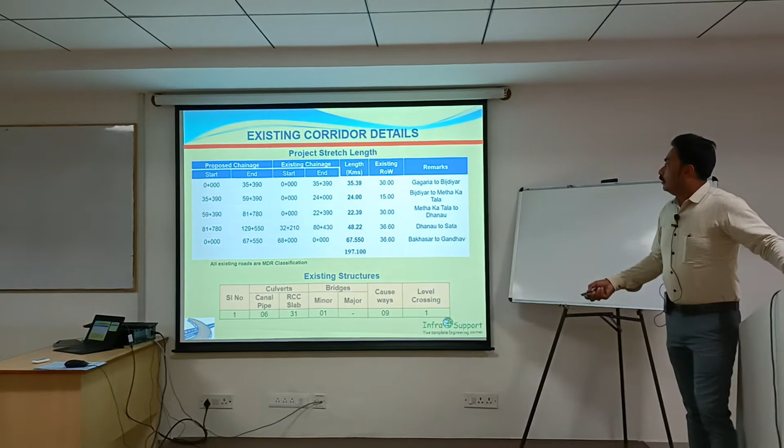Okay, fine. So... this is the receiver for this side. Is that USB connected? Yes. Oh yeah, it's USB connected. USB is connected. Distance is not key.

Okay, so this is a road project in Rajasthan, in a district called Barmer, close to the Pakistan border. Recently, about 4 or 5 months back, if you read the newspaper, Nitin Gadkari, your transport minister, landed his aeroplane on a road. Any of you read the news? That was the road we designed. That is the first road where the government wanted to build the carriageway as a runway also, so that an emergency landing can happen. Now they have made it mandatory on selected highways. So it is for a strategic purpose. And since this road was also on the border with Pakistan, we have designed a runway also in this.

Now, typically when a National Highway Authority of India, or Ministry of Road Transport and Highways, or a Road Development Corporation in Karnataka or any state appoints a consultant like us to prepare a DPR of a project, that project road can vary from say 10 kilometers to 100, 150, 200 kilometers. For every road to prepare a DPR, they expect a team of qualified civil engineers.

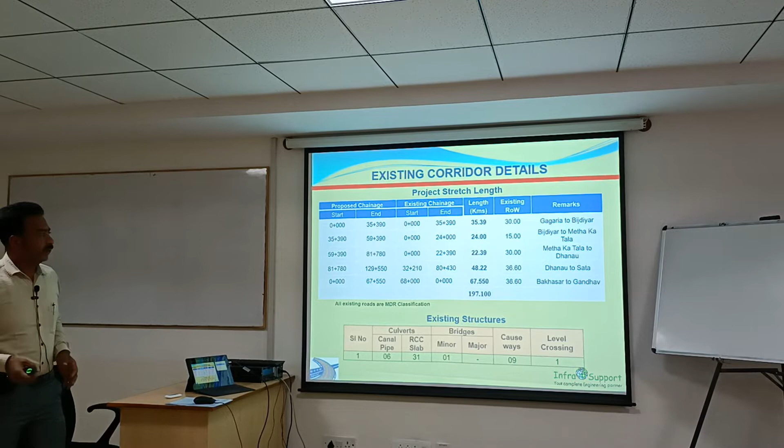So what we do first is understand what kind of road it is, from where to where. If you consider the 200 kilometers, it is not constant, not homogeneous - you will have different villages, towns, settlements. So we break it down, and also depending upon the carriageway width, some length may be intermediate, some may be single lane, some 2 lane, some 4 lane. Based on that we make homogeneous sections - this point to this point has this characteristic.

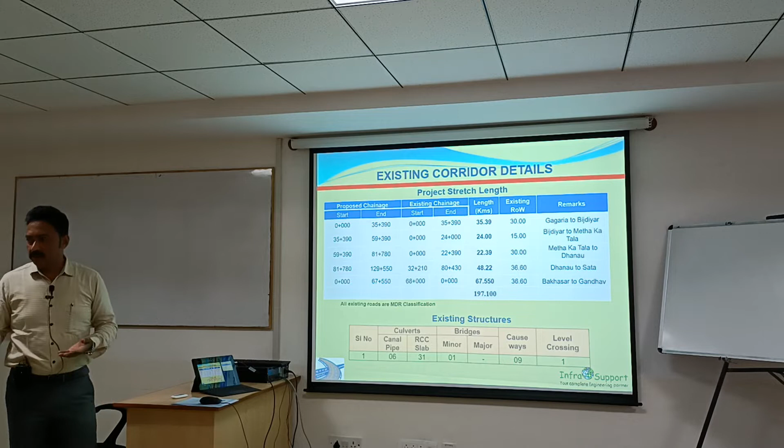You see what we have done - the ROW varies from section to section, and across all this, we noted the kind of culverts and bridges present. One thing we observed on this road is there are very few cross drainage structures. The same road in South India would have, for 200 kilometers, at least 150 bridges, culverts, minor bridges, major bridges. But there it is a complete desert - this part of Rajasthan is desert with sand dunes. Not many cross drainage structures because there is no rainfall and no nala streams and such.

First thing we have to do is check the existing right of way (ROW) available, which is very important nowadays. If you've seen everywhere, land acquisition is a big issue, and everybody is interested in knowing how much ROW is available.

Now, what is the number of villages or towns within this corridor? This is important to note. So first we determine from which NH to which NH, what different kinds of villages are there. There are so many villages here, though this is far less compared to other parts of the country because it's a border place and a desert.

Now in any typical DPR, you will have to do all these investigations and studies. First is road inventory and condition survey. You might all know what inventory and condition survey means. Within that you will have about 10 things to do.

In inventory, typically you measure the width, length, height of the embankment, all that. The condition survey tells you the pavement condition, crust thicknesses, distresses, all that. Then similarly you should know exactly the same for the cross drainage structures—how many bridges, how many culverts, and their condition, whether good, bad, or failed.

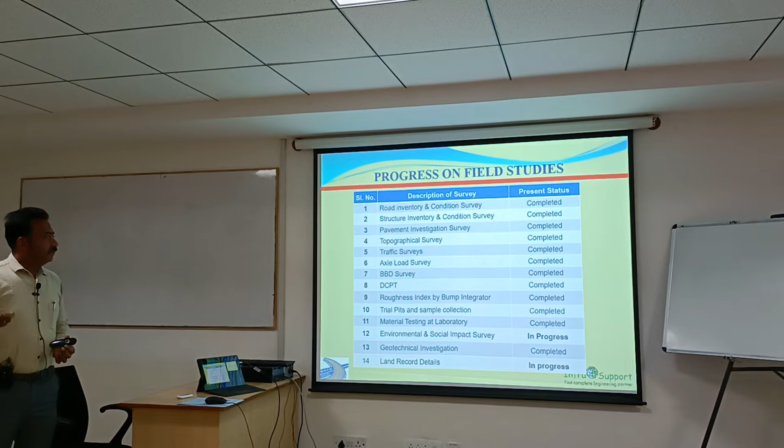Then Benkelman beam deflection survey, again for pavement deflection. Now we've moved—this is a 5-year-old project—so we've moved everything from BBD to FWD, falling weight deflectometer. Then we also do DCPT, which is again a soil test, CBR. You take a pit and do a dynamic cone penetration test that gives in-situ strength of the soil. Then roughness—earlier we used the bump integrator, now we're moving towards the roughometer.

Then trial pits are very important to know the pavement design—you need to know soil characteristics, soil strength, CBR. Then material testing: you have to test the soil, and also go for borrow areas to see where your soil and aggregates are available, and whether those aggregates and soil are suitable for construction. You have to test all that.

Another important survey, normally not taught in classrooms, is environmental and social impact surveys. When it comes to environmental, there's forest lands—if the road goes through forest land, a separate study must be done on the impact of this project on the forest. So how many trees you're cutting, then there's a series of permissions required from the forest department. That is called environmental impact survey.

Similarly, social impact is when there will always be some houses or villages you have to pass through, and you have to demolish those houses. This is called social impact. So what happens—how much compensation do you have to give? Can we demolish this house, or if not, is there an alternative alignment to take? These are all part of the social impact.

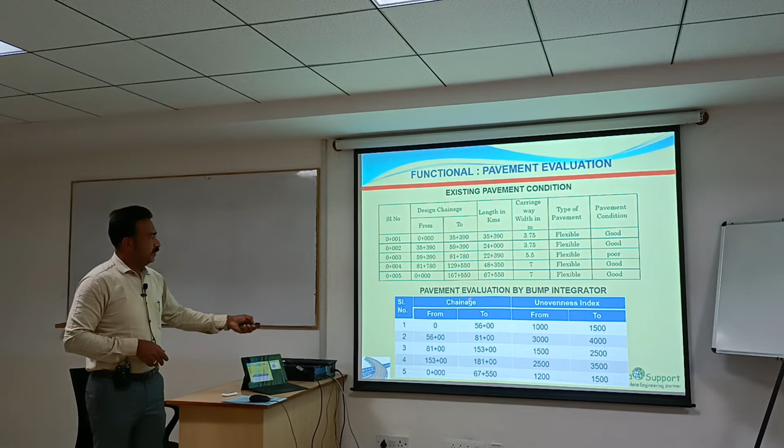Now there is a variation in roughness also. Like up to 56 kilometer, the unevenness is like this. Then you have 3 to 4, 1.5, again 2.5, 2.5 to 3.5, 1.2, 1.5 — it varies.

So these homogeneous sections — how do you make this? It's absolutely left to highway engineers, based on our experience. There is no standard rule. Depending upon the outcome we want to deliver, we can make these homogeneous sections. If you are smart enough doing a proper homogeneous section, you will save a lot of time in the entire study analysis.

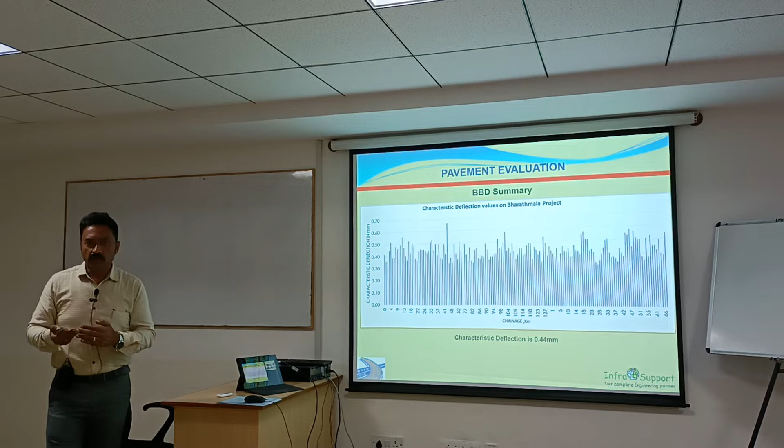Now again the deflections. We plot these deflections kilometer wise for the entire length and see. If you have studied deflection values, you will know — if the value is say 0.8, the value is less, the condition is good.

Or it can take load, the serviceability index is still good. Normally in our practical experience we keep 0.8 as a parameter. Some people will say 1 — anything greater than 1 is not good — but we keep around 0.8. Anything more than 0.8, we will again go for subjective studies to see whether it can be placed or not. So 0.8, 1, you should always remember when it comes to deflection.

Now, you have all been taught how to do a BBD survey. Remember this? What do you get in the BBD? So what does the deflection give you? What is the outcome of the deflection study? What do you mean technically? So you get a value of say 1.2 — what does it mean? It is a Benkelman beam method. So what does that indicate, if the value is more?

You all know — come on, shout it out. What's the answer? This is not taught in pavement management? Come out with the answers. What do you understand by a higher value of deflection?

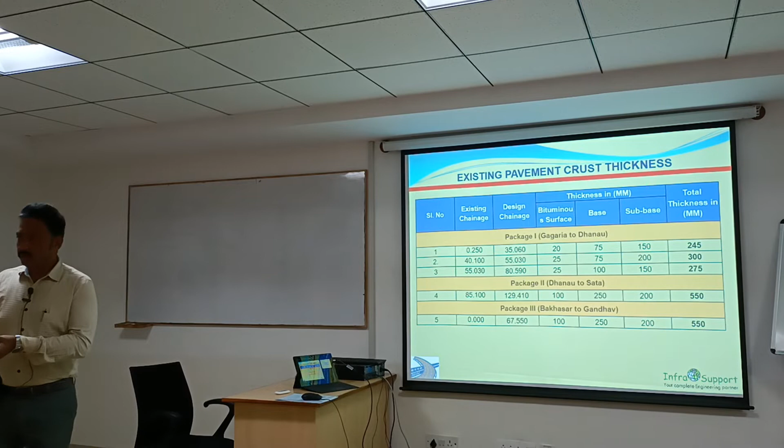Now you do a pit at the edge of the carriageway to measure what is the thickness of the existing pavement layers. In this case, there was a kind of sub-base layer of 150 to 200, base layer as all aggregates, and then a thin bituminous layer. That's all was in this road. It is not well constructed.

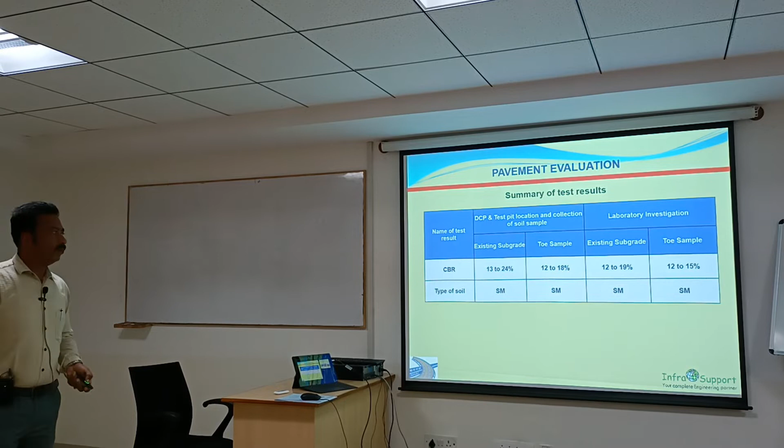Now, you all know CBR, right? Why we do CBR? Bearing capacity. Yes, study CBR, why do we do CBR? To design a pavement. Based on the CBR, you know the graph, right? That is how you have to design a pavement, and somebody has invented CBR, so you have to do this - it is a value, it gives a strength, and based on that only you can do a pavement design. So you have to do mandatory CBR. You know how to do CBR and all, right?

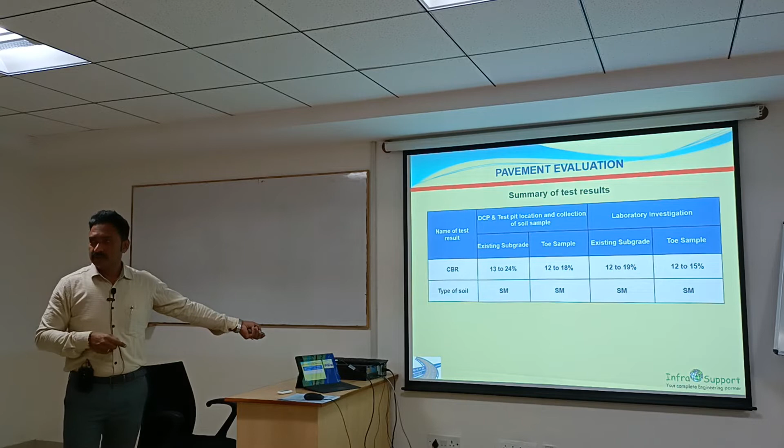This is how you do a test pit. Not very professional, but there's a kind of labourers we got there. Actually, you have to cut at the edge so that your pavement layer has to be exposed. There is an IRC code how to do 1 meter by 1.5 meter depth and all. The problem is again you do the pit and then you have to backfill also. So somehow we are little practical.

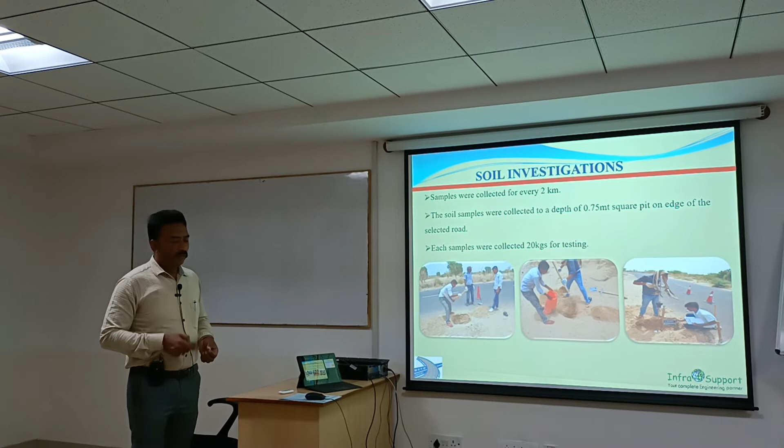You are able to see this, I mean this is fairly okay. And then collect the sample for CBR test. And we will also have a slate written what is the chainage number and all. These are for records.

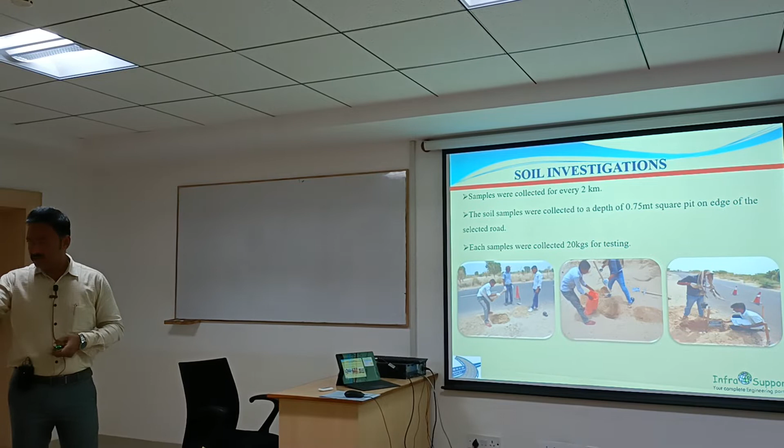So you have studied here, right? So we did every 2 kilometers. Do you know what frequency we should do CBR? Any idea? Yes, no? As such, there are no criteria like how frequent you have to test for CBR. But only thing as engineers, we must test everywhere you see physically there is a change in soil at least color type. But otherwise, we normally say about 2 kilometers we take samples so that we don't want to miss any changes in the soil characteristics.

Because you must always know if you are studying about 50 kilometers of road and every 2 kilometers you test CBR, every meter you do roughness survey, every 50 meters you do deflection study, you are not going to design road for every 50 meters. You are not going to change the crust thickness for every 100 meters or every kilometer. You always design for the weakest soil condition and the heaviest traffic loading, right? Weakest soil and heaviest traffic. So that's why the homogeneous sections play very important. You take the homogeneous section of 20 kilometers, you will always design for the heaviest traffic and the weakest soil.

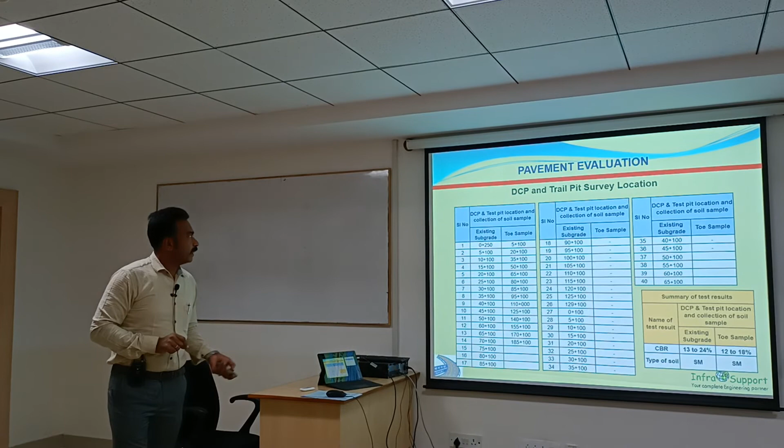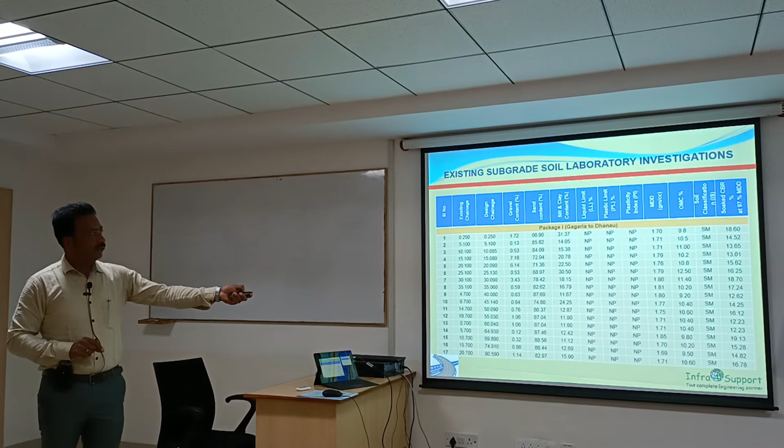So again, this is again a kilometer wise test. Then CBR, whatever the chainage has been collected, sample. This is all the classification. You all know these terms, right? Liquid limit, plasticity index, MDD, OMC. You are all aware, right? What is important in this?

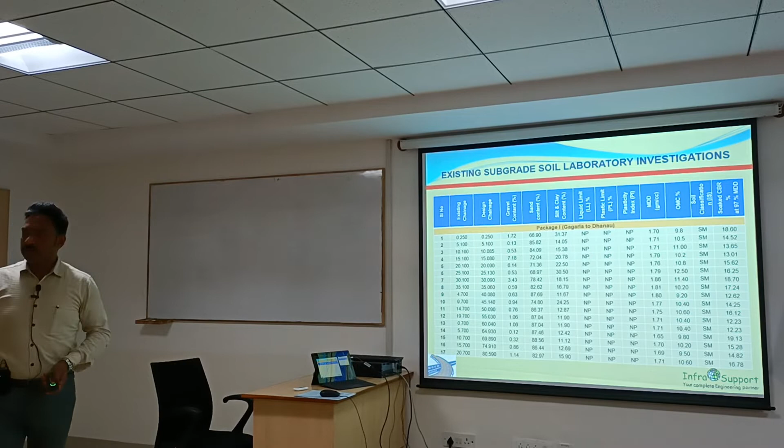2-3 parameters, MDD is important. OMC is not important. MDD is important, right? So CBR is important. Density is important. Plasticity index is important. 3 things you always remember in any soil for road projects. What is important is number 1, plasticity index - your soil has to be PI value of NP, right, that is very critical. A density of more than 1.7. CBR value we can design for any 2, 3, 4, 5. Normally we prefer about 8 to 10% CBR. Now the new codes are asking us to design for 15% CBR also. So always remember 3 things, right? Plasticity index, your density, and CBR.

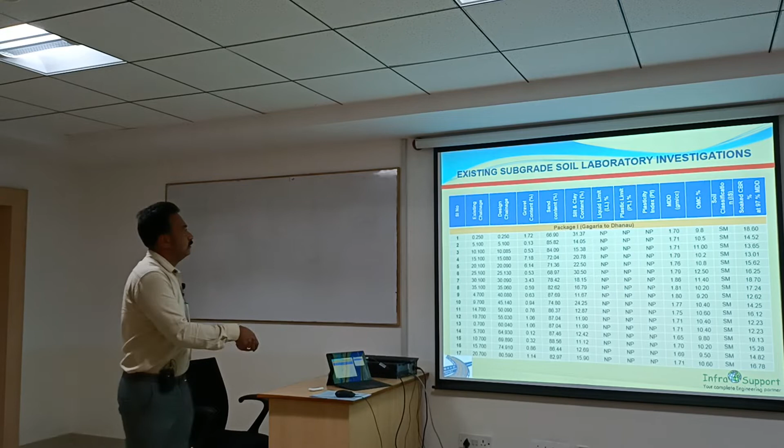Tomorrow when you attend interview, we'll be asking the same questions. You should prepare for all this.

So again, what my team does is they go along the road and find out where the quarries are available. Quarries are very important. Without soil available, without aggregates available, it's very difficult to construct the road, and also it requires for your costing. You should know if the soil is available close by, the cost will be less. If it is far off, the cost will be more. Unless we assess this properly, our entire project costing will go wrong. So you will have to check aggregates and earth, soil.

Bring the samples, again test for acceptability. If it is soil, you always check whether CBR is there, density is there, and plasticity index. If it is aggregates, you know all the tests, like gradation and impact, flakiness, water absorption, right? Yeah.

Okay, so very important then, traffic studies. Why should we do traffic studies? Traffic is the basis for the road development, right? If there is no traffic, no road is required. So depending upon the volume of traffic, you will decide how many number of lanes are required. Traffic is less, 2 lanes. Traffic is more, 4 lanes. Furthermore, 6 lanes, right? That is why you require volume studies.

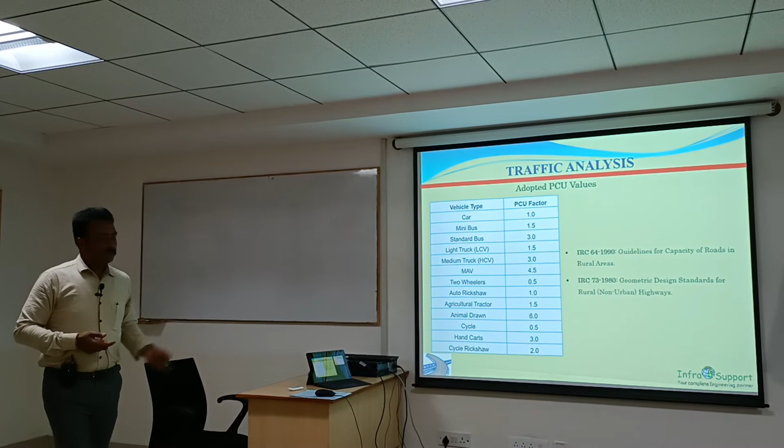You know PCU factors? Yes? Yes, no, maybe? Say yes, I'll not talk about it. Say no, I'll talk about it. ICM students would not be familiar with it because there are both branch students here. Highway students would know about it. Okay, so then they should not know also, not required, right? Passenger car units - this is the factor to convert all vehicles into a single parameter. These are the values, and you get them from IRC if it is a rural highway; if it is urban, it varies. You must know that PCU values vary from rural to urban. Yes, you are aware. Okay.

Now, once you do traffic survey, you do 7 days, you average it out, and you get a value. It is called average daily traffic - because you are doing either 3 days or 7 days, you count all 7 days divided by 7, you get average daily traffic. Now this is based on the survey. This section, second section, third section - you see the value, very less. Border, only a few vehicles used to go there.

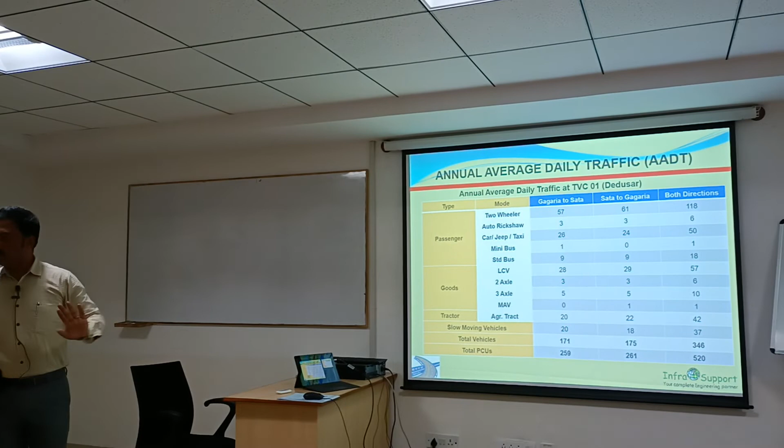Very simple, and there is an IRC code to study and do this. Tomorrow, whenever you are into traffic engineering work, you must know these parameters: AADT, seasonal variation factors.

Once you get AADT of that year, are you going to design the road for this year's traffic? No, you are not designing for this year's traffic, you are designing for the future traffic, right?

If it's a national highway, we take about 20 years of traffic. For local roads, we take about 10 years. There are codes which say normally 10, 15, 20 years of traffic. Traffic for deciding the number of lanes is different from traffic loading for pavement design - these are two different parameters. For pavement design, we take about 15 years for national highways, about 10 years for local roads. For capacity augmentation, we take about 20 years.

Now you project the traffic for at least the next 25 years. How do you project the traffic?

Is that part of your syllabus? Yes? Okay, so I'm not getting into detail. There are different methods of traffic projections. Whatever method is being taught to you, you must know exactly how it is done, right?

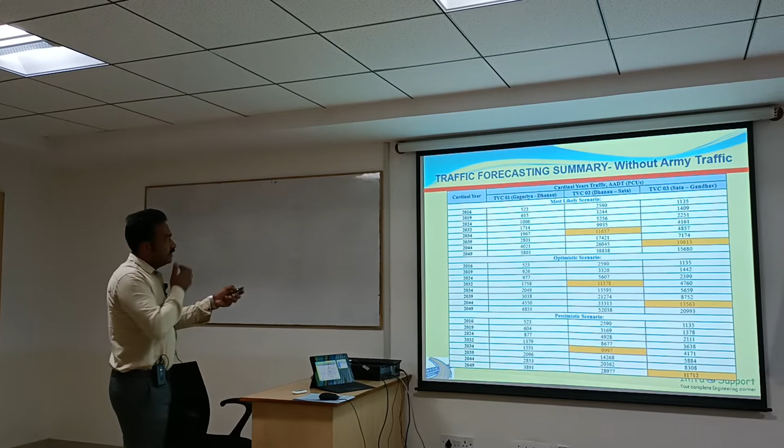So this is what we do. We project traffic, and for every 5 years we get these figures. Normally when we project, we do 3 scenarios, right?

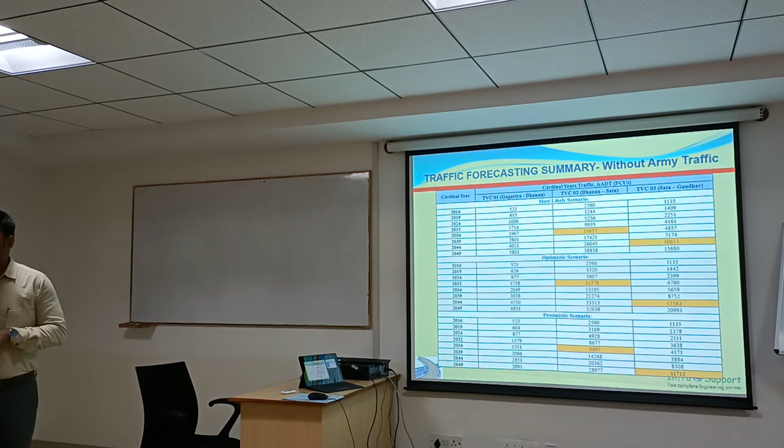There's a pessimistic scenario, a very negative kind of thing - growth will not happen, it may be about 4% growth. And we do an optimistic scenario, or most likely - optimistic is like, okay, super growth will happen, like 8%, 10%, 9%, and there's a normal growth. We always do 3 growth scenarios, and then we take the mid value, right? That's what we do here.

If you go to America, they do traffic projection for 100 years - 25, 50, 100 years, and it must be there in the records. That is why if you see in America, the roads built 50 years back, even now, are not over-choked like our roads.

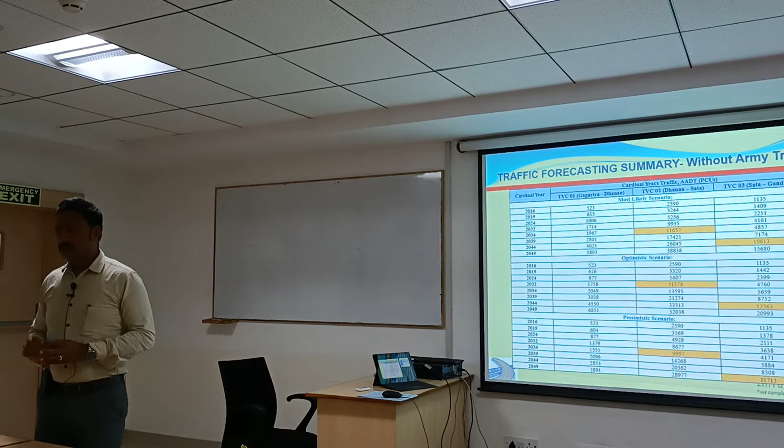So they take a lot of interest in this, and they don't compromise. I have traveled most of the roads in the US, but we don't do that. Why?

Because there are too many reasons, government thinks they don't have money, and they think it's not possible to invest all the money now. There are various parameters, but when it comes to traffic projection, they do 100 years traffic. They assess what might happen even after 50 years, and they acquire all the land required for 50 years now itself. That is how they function.

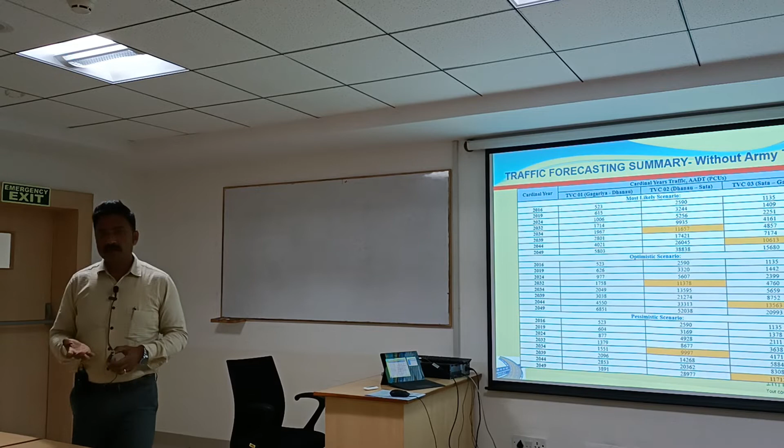What we do is absolutely opposite. We only do projection for 25 years, and again we design for 10 or 15 years. By the time we complete the construction of the road, we will be back to the traffic level where it should have been 10 years back.

In traffic projection, one important aspect you must know is generated traffic. Any road that gets developed, you will see a lot of development happens - factories, industries, townships - and the traffic generates.

So as a traffic engineer, you must take that into consideration, and also seasonal traffic. In our road, what happens? You saw only 500-600 vehicles per day traveling. But we visited the army to understand what kind of traffic they generate. They said every year, 2 times a year, they bring all their vehicles on the road and do a drill, for 1 week to 15 days.

So we have to consider their vehicles also in our traffic projections. Without that, we would not even require a single lane for the 500 traffic. So we took that traffic also, added it, and determined what lane configuration is required. Even adding all that traffic, we found that only a 2-lane road is required.

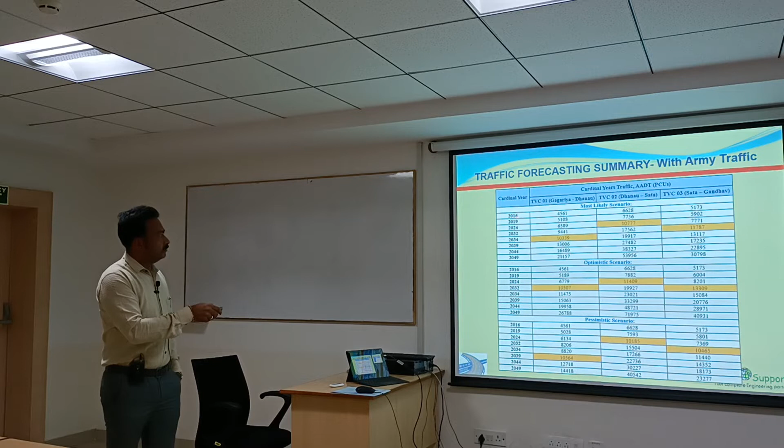We did all these calculations, so I'll just skip that. Based on that, we said from 2016 to 2034. What is the difference in number of years here? 14 plus 4, right? 18.

So 2016 is the traffic survey year, 2 years is the construction period, and we always take 15 years from the opening of the road, not from the day we do the survey. Always remember, survey is done this year, you have to leave 2 or 3 years for construction, and from that day, 15 years. That is how you get 2034.

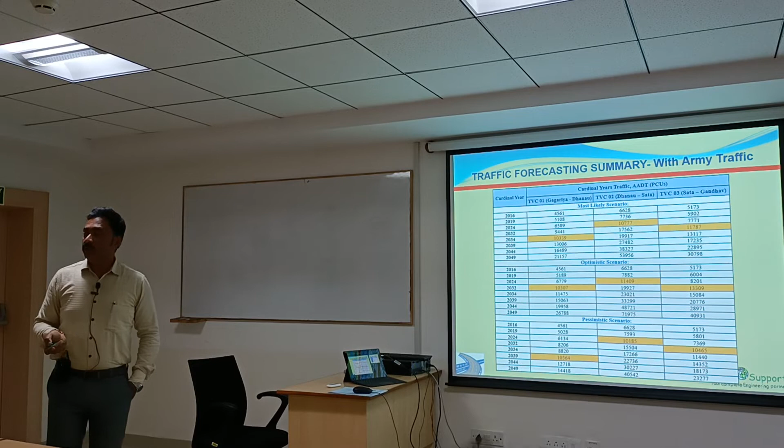Then this is the capacity. Do you know what is the capacity of a 2-lane road? 2-lane, 4-lane, single lane in area - you must be knowing. If you don't know, you have IRC codes in the library.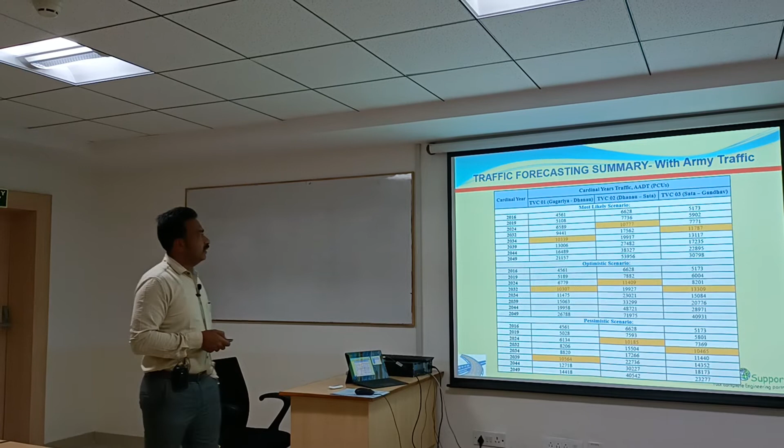IRC 64, note it down. After this class, you should go and read IRC 64. It's not available on Netflix. The library will have it, let them read it. You must understand what are the capacities. So the capacity of a 2-lane road is, no, 30,000.

In the NHA manual, they have brought it down to 20,000. So go read it yourself, go to IRC 64. Last 3 pages will be there. It would have given the capacity of a single lane road, 2-lane road, 4-lane road, and what is the code I showed for urban traffic? Remember, 64.

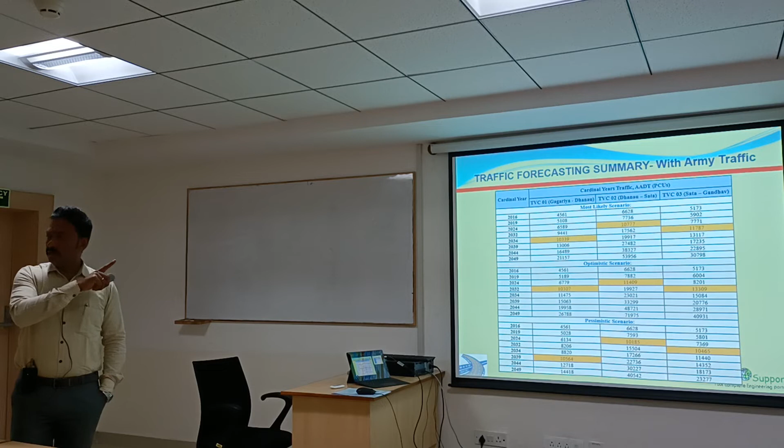Not 43, 64. 64 and 70. Go to the urban code also, read that too. This is an assignment for you - try to understand why there are different capacities for urban roads and rural roads.

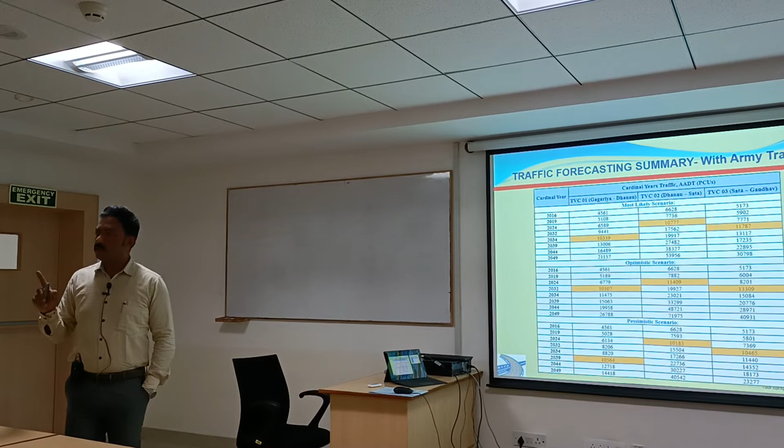In rural roads, the capacities are always per day. In urban, it is per hour. Okay, this is the key difference. You need to understand why urban is per hour and rural is per day. Then you will know the subject well.

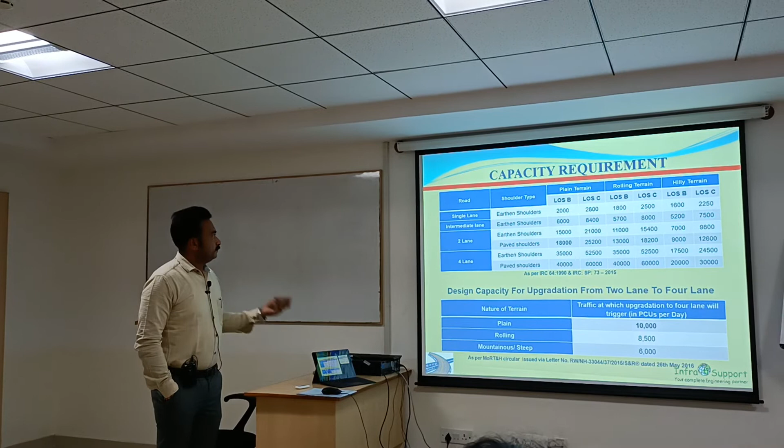Okay, are you studying level of services? Yes, no, maybe - yes, yes. I need a voice, yes or no? Yes sir, yes, be vocal. Either you say yes, or you say no, or if you don't know, say maybe. Yes, no, maybe, what is that?

No? If you haven't studied, please, after this class, study about LOS, level of service. Level of service varies - it's called LOS A, B, C, D, E, F. Go search the internet, you will get a lot of studies. IRC 64 also has LOS, but not elaborate. Try to understand what is LOS - go back, internet, sit for 1 hour, study on LOS.

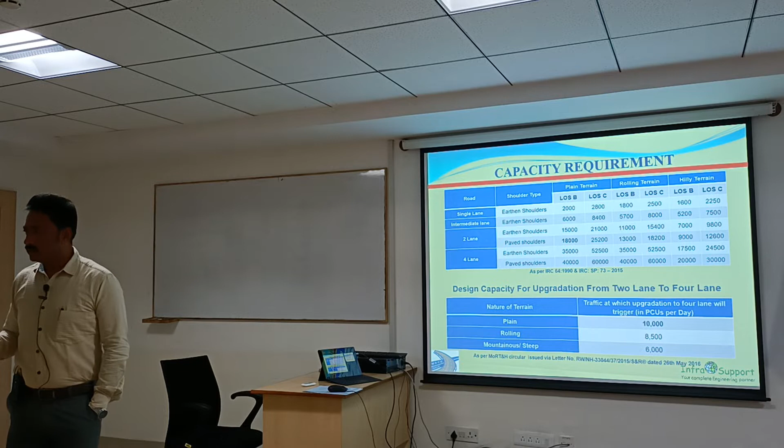You will understand why, if somebody says or you experience too much traffic in our Bangalore roads, or Bangalore-Tumkur road, why so much traffic, why these lanes are less. You should know what is LOS, level of service.

It's a very big subject, probably PhDs can be done on it, but one thing you should know: if the LOS value is A, it is like ideal. B is good. C is okay. D, E, F is a jam condition.

In our rural highways, we always design for LOS B, that is as per IRC guidelines. If it is urban, we design for LOS C. So you yourself try to understand why you should design for LOS B and LOS C, what are the scenarios in B, C and all. I'm not going to explain here. Basically, it shows your volume to capacity ratio conditions.

Okay, so I'm going to now move away from the topic. This is important, right? You know, axle load survey, you get these parameters, you use for pavement design. And how do you do pavement design? As per IRC 37. So you need to arrive at this.

Design traffic in terms of MSA, million standard axles, right? And you know design MSA and you know the CBR, and you go to IRC 37, 2018, go to the relevant chart, go to the table, you get the pavement thickness. You all clear? Okay, so you know how to calculate this design MSA - commercial vehicles multiplied by VDFs, 365 formula, right?

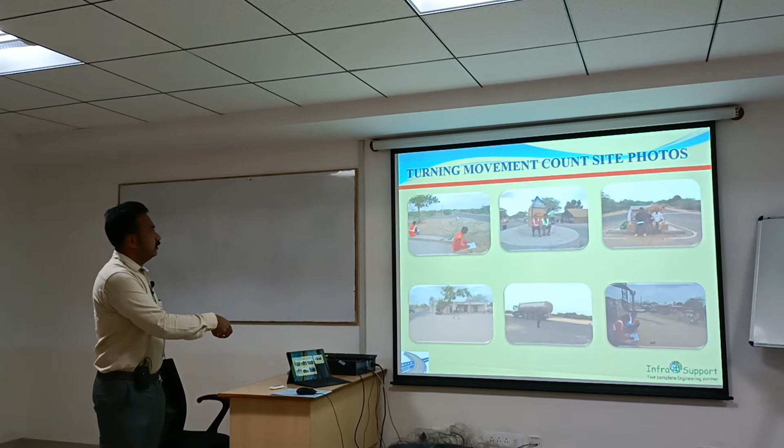Okay, these are all some of the photos. We did all the studies - axle load survey, traffic turning movement counts. I told you petrol bunk, right? Collecting data from the petrol bunk.

Okay, now you did all the studies, surveys, investigations, you are done. You are fairly now clear that you know what is happening in this road. Now you have to design that, right? So where do you start designing? So you will have certain design standards, right?

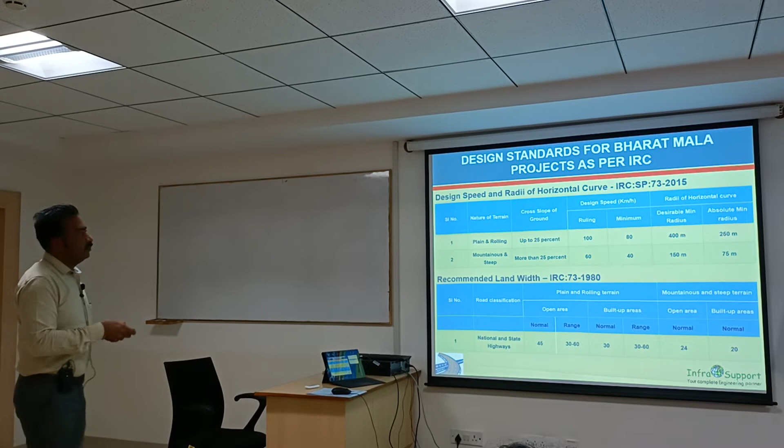If you are designing a national highway, you want design standards for national highways. If you are doing a design of an urban road, you will have certain design standards for urban road. So you will have to first get into the relevant code and extract all the parameters. See, you don't have to remember all these things in your mind, but you must know which code you should refer.

If I am doing my traffic analysis, which code should I refer? You should know IRC 64. If you are doing pavement design, you must know it is IRC 37. Or if it is an overlay, IRC 81. And if it is a rigid pavement design, IRC 58. So you must know these codes.

Then you can always go back to the codes and get the relevant sections. So here, this is a code called IRC SP 73 2015. You must study this code out of your interest in the subject, not for the exams. I don't think whatever I'm talking now is ever going to be in the exam, but it is for you to know about the subject, and it's going to help in the future.

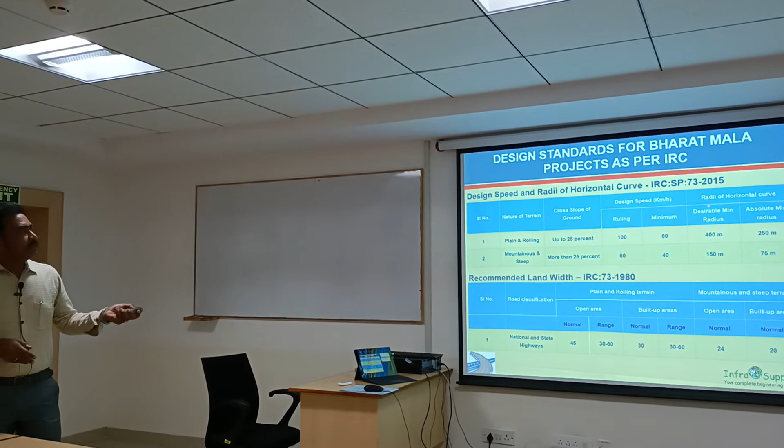Now, IRC SP 73 is a two-laning manual from the Ministry of Road Transport and Highways. We have to design all the two lanes based on this manual only - one single manual to give all the information on how to design traffic, pavement, everything. 73, and the first version, I think second version, 1980. Okay, so it shows what is your terrain conditions, how do you...

Okay, now. Fine. You go to the manual and you have geometry design. You know what designs you should do. So you will design the alignment, you should do the profile design, you get the cross section designs, everything.

And based on the traffic volume, if you require a flyover at the junction, there are values. If the projected traffic at a junction is crossing 10,000 PCUs, it warrants an interchange. If it is not, you don't have to do it.

Then there are typical junction designs. NHAI design manuals - get into that. You know how to design a 4-lane junction, 2-lane, 3-leg junction, 4-leg junction. It's all part of the design. So it's a big subject itself, not going to cover it in this short period. So once you do all that, you will prepare a summary of all the proposals for the road.

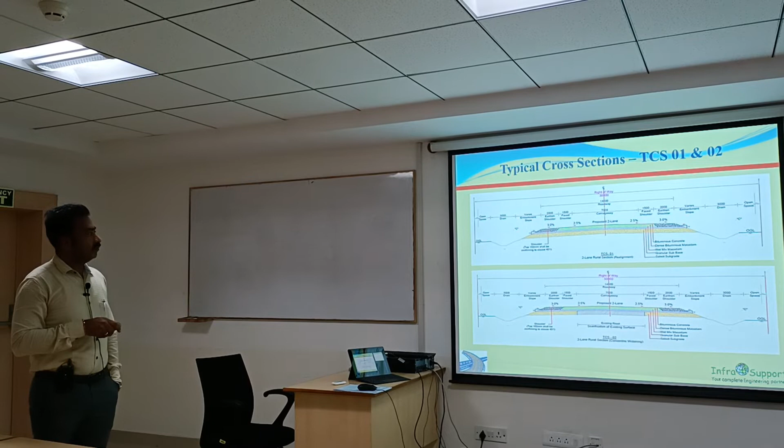This is a 2-lane cross section. You have to mandatorily have a 7 meter carriageway, 1.5 meter paved shoulder, 2 meter earthen shoulder - altogether what is the width? 14 meters. That 14 meters is what you see on top. Depending on the height of embankment or cutting, the overall width of the toe line will vary.

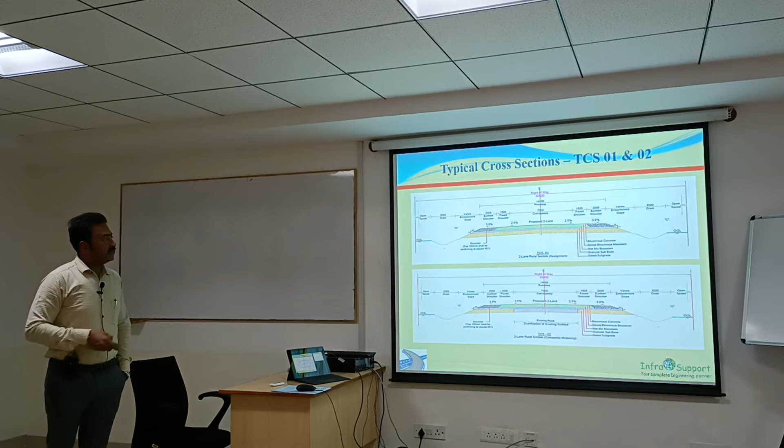Now here in this case, you see this embankment varies. What is the slope here? 1 vertical to 2 horizontal, 1:2. So it means if there is a 1 meter height of embankment, what is the width of this embankment? 2 meters. If the height is 2 meters, then 4 meters, right?

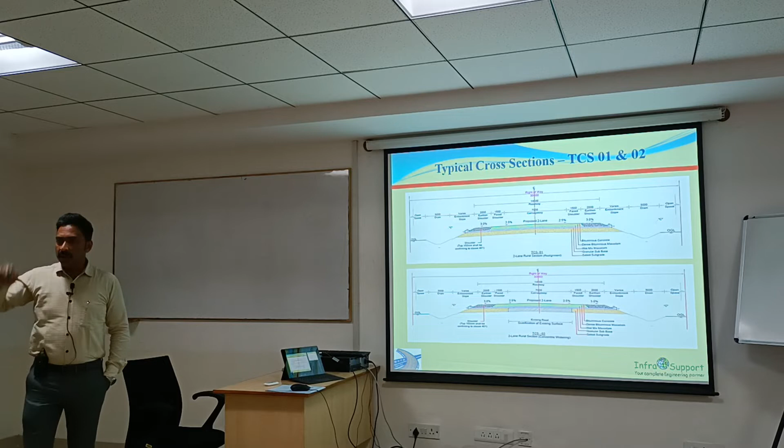Then you will have one earthen drain, then this is where your ROW comes. So how do you fix the ROW now? If there is 50 kilometers of length, you take the highest embankment location, right? All others are constant, only this varies. So take the highest embankment location, if it is 3 meters, 3 into 2 is 6, 6 this side. Add all, you get one value.

So the manual says a minimum ROW of 30 meters or 45 meters or 60 meters. In case your requirement goes beyond 30 or 45 meters, what do you do? You put a restriction here, by putting a retaining wall. You bring the slopes to 1:1 vertical and reduce the width.

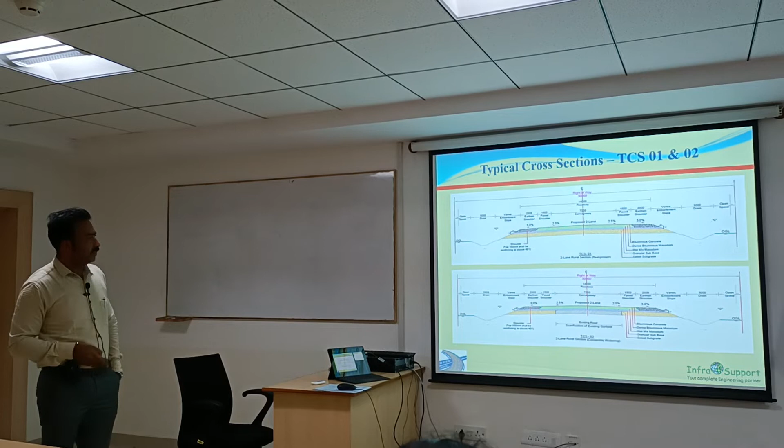Now this is TCS 01, TCS 02. What is the difference between this and this? Can somebody tell? Subgrades... Exactly, you said right. Here it is existing road, we are utilizing it. We have written here, scarification of existing surface, and we are building a GSB layer on top of it, and the rest everything remains same. What we are doing here, you are not seeing. It is a realignment section, where there is no existing road. So this is the difference, right?

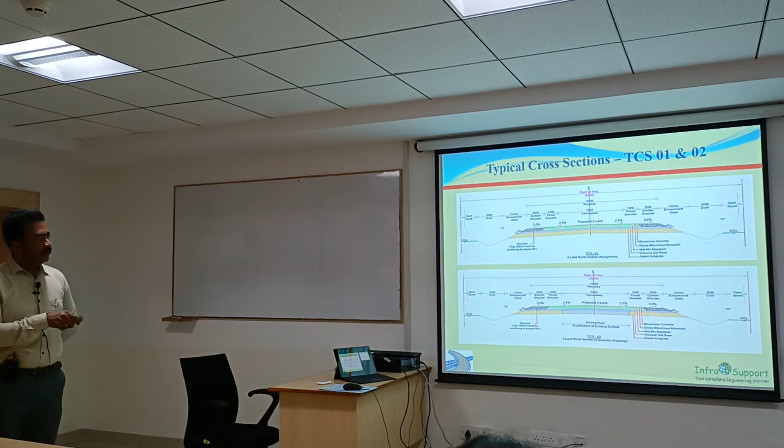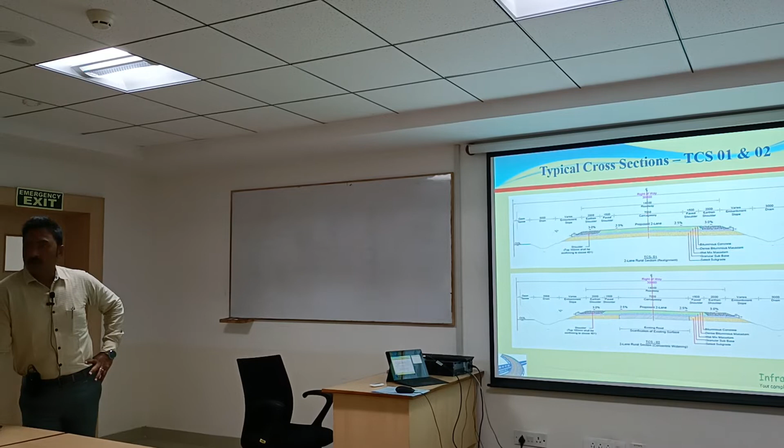Ratnakar, if you can highlight the concentric widening one, which is on both sides, and sometimes only on one side - why does that happen? There's a lot of dispute on it. See, when you have a 45-meter ROW, some code says you must do widening on only one side. Use and bring your ROW on the left, and then only construct your new road on one side, leaving the other side for future widening. But it is not working. Why it is not working? Practically, if you do on one side, protecting ROW on the other side is very difficult. Giving access to other properties and all is difficult. So it is only in theory. Practically we are not doing it anywhere - we always go with concentric widening.

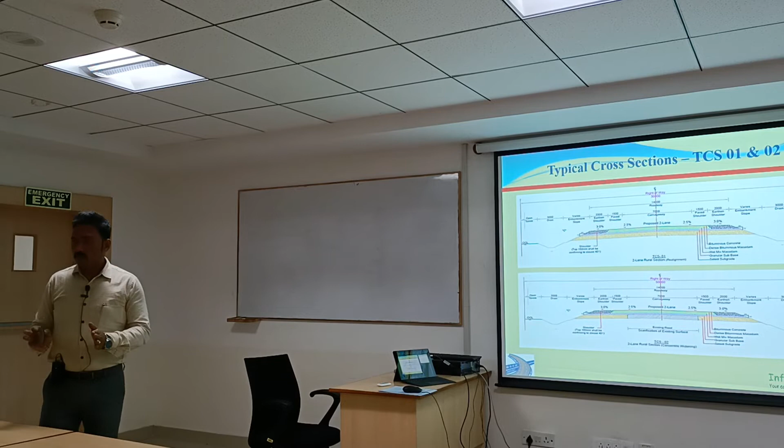So when I started my career 20 years back, we used to do a lot of option analysis - what if I fix the center line on the edge of the carriageway? So eccentric left, eccentric right. We did a lot of projects like that, but implementation is a big headache. So it's still of academic interest only. Right now you don't worry about it.

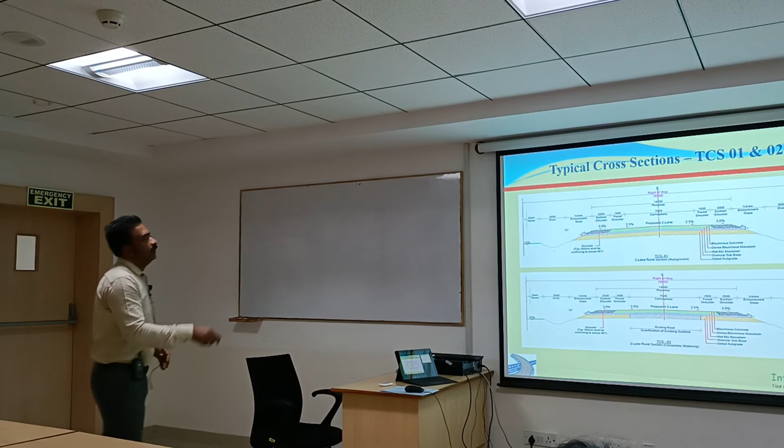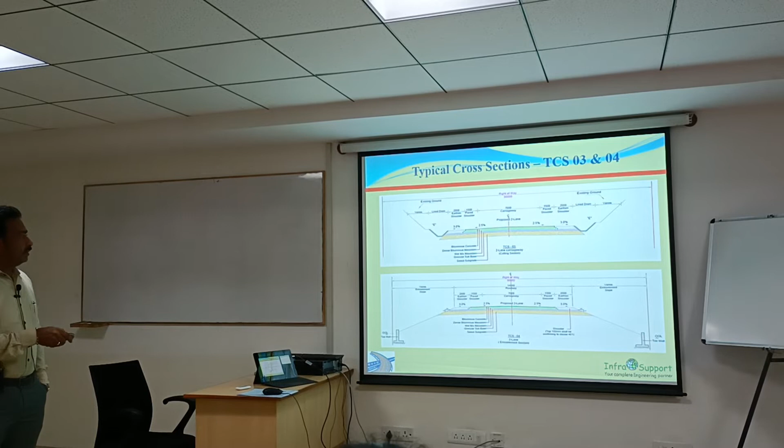Now again, TCS 04 - what is happening here? So I told you, we got a 30-meter ROW. If the height of embankment is more, this embankment line is going beyond your ROW, so you are putting a retaining wall. That's the only difference - rest all remains same.

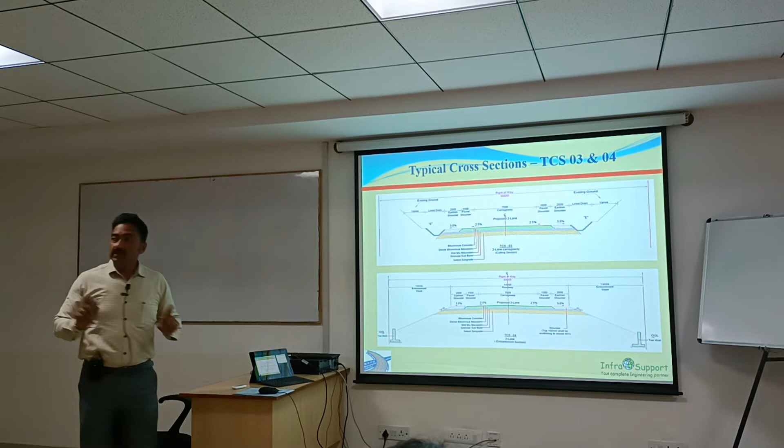So identifying these structures and exact changes is in the hands of the design engineer. When you design in road software, you will run the cross section, you will get the toe lines, and you will have to mark exactly. This is where the engineering happens. If you miss out here, the end product will have variations.

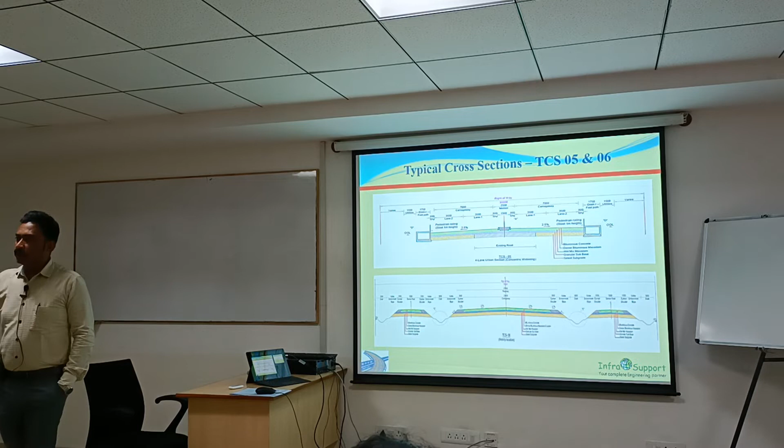This TCS 06, airstrip - I think it's not visible from there. It is 23 meters wide. Then we gave separate service roads. Why? Because if the plane is landing there and some vehicles are also coming, they need a space, and emergency ambulance access too. There are guidelines - a separate set of guidelines for runway design. I think some of you might even get into runway designs also. We do that too. So there are separate manuals and guidelines for runway designs, from the Airport Authority of India.

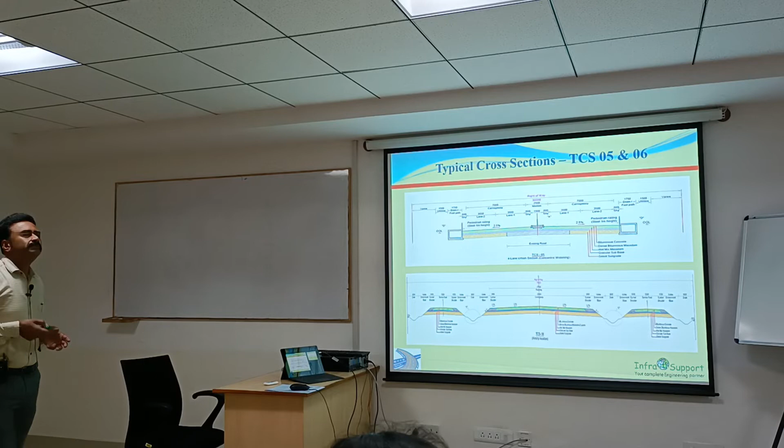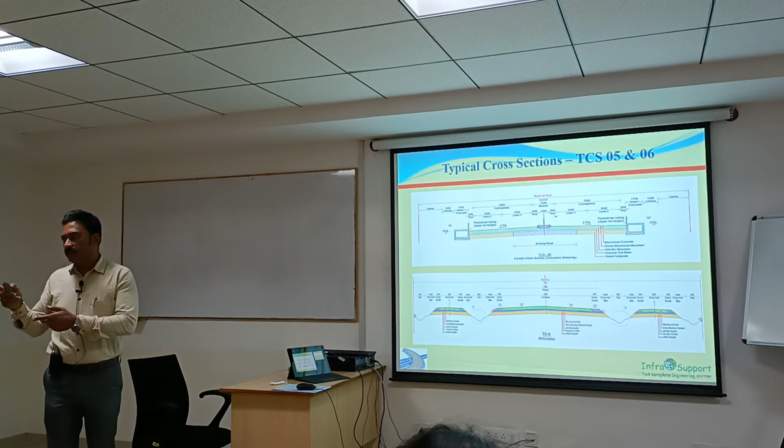Another organization is there, so the whole method itself is different. How do you design? Mostly on American standards - we still follow that. Like roads, we have IRC standards; there it's called FAA, Federal Aviation Administration of America. So we follow most of their guidelines, and the thickness is different - all these thicknesses will vary. We call it 250mm WMM, they give 500mm WMM. So thickness, everything varies depending upon it. Again, there it's very simple - here we design for heavy traffic loading and weak soil, there the design is for the heaviest aeroplane. Like Boeing's biggest aeroplane, you design for it.

So this is again a 4-lane road with a 60-meter ROW.

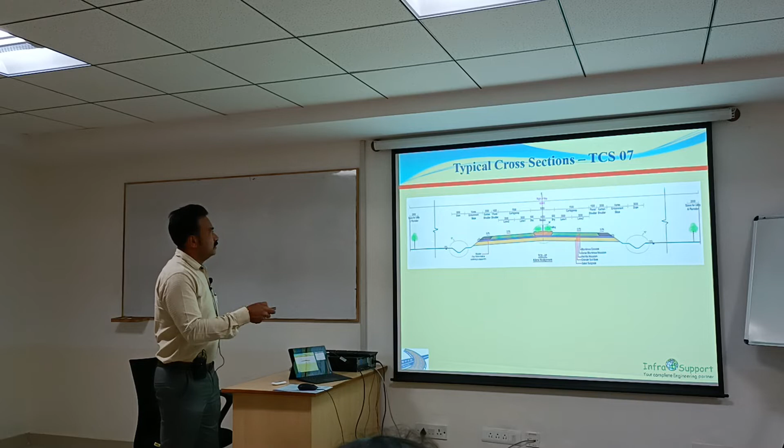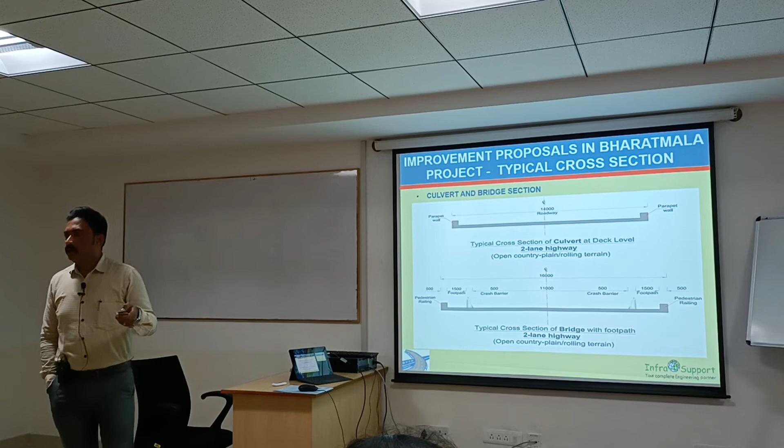Now, while you all will be working on highway, pavement and all, you will have your colleagues working on the structures, right? Those who are on MTech structures, or maybe civil, sometimes you also will work. It's not rocket science, but you will have to give all the widths and all for them. I want a bridge of this much top width, culvert of this, and we only as highway engineers will tell what is the length of the bridge, what kind of interchange is required, what kind of flyover is required. The structural engineer will only design for what we want to be designed there.

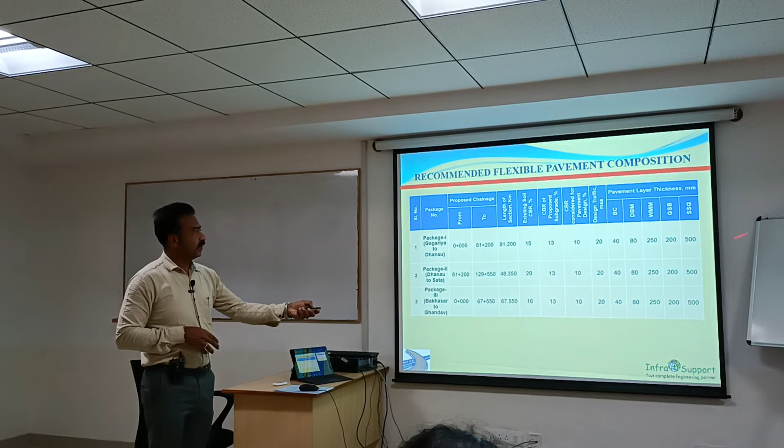So for the pavement, we have recommended 40 BC, 80 DBM, 250 WMM, 200 GSB, and subgrade of 500. Any flexible pavement design is not going to vary much, except for your BC and DBM, all this will remain same, whether it is 50 MSA, 150 MSA, or 20 MSA, only these parameters will vary. This all remains same, except in cases where you have very weak soil, like black cotton soil or marshy soil. Rest everything remains same.

Where the toll plaza comes, not the runway, only at toll plazas we design PQC, pavement quality concrete, 260 mm, DLC, GSB, and then CBR.

So embankment height is okay. For you to do quantification, estimation, after this somebody will work on the quantities. So you, as a design engineer, have to give him chainage-wise embankment heights. Without that he cannot calculate quantities. What is the height of embankment? Based on that, what filling is coming, what cutting is coming. So you will have to generate this from the software. That is your primary job.

Okay, the geometric improvements I'll show here. I will... skip this.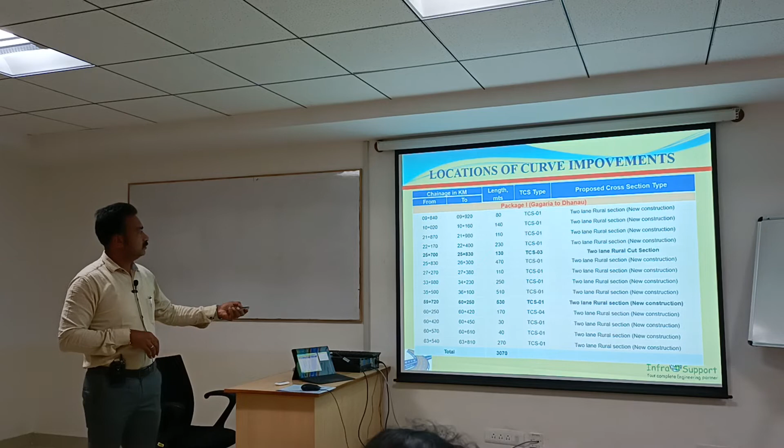We are talking about curve improvements, right? So if you see here, the existing road is going like this all the way, like this. So you got one curve here like this, one curve is like this. What you have designed is combining all of them into one single curve. Similarly, if you see here, the road is coming like this, then taking a left turn, again taking a right turn and going like this. So what we have done is, we have actually realigned this into a super curve. This, as highway design engineers, is your primary job, to make sure you do a proper geometric design.

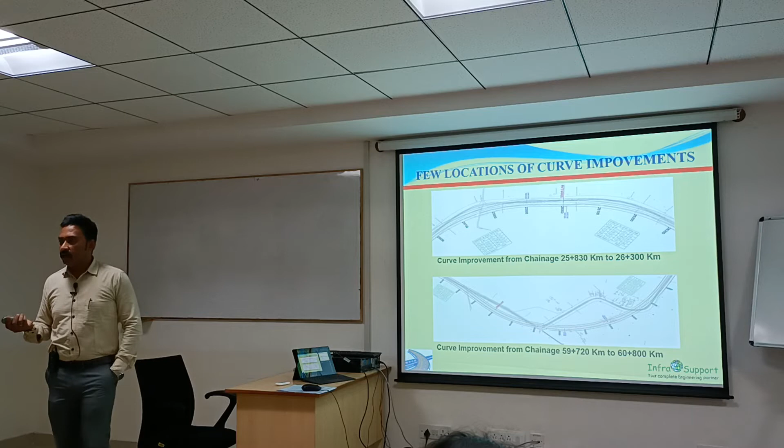And you see all these accidents happen. Recently, Cyrus Mistry died, you saw in the paper, blaming design engineers. Partly we are all responsible for that. Unless we are carefully designing all this, we'll end up having accidents. If you design this for 65 km speed and the vehicle comes at 100 km per hour, then the vehicle will overturn.

So again, everybody wants options. What is the guarantee that whatever we have done is correct? So we'll have to work out different options, option 1, option 2, option 3, and get the optimal length. In any realignment, what is optimal is the least length, the least length satisfying all the design requirements.

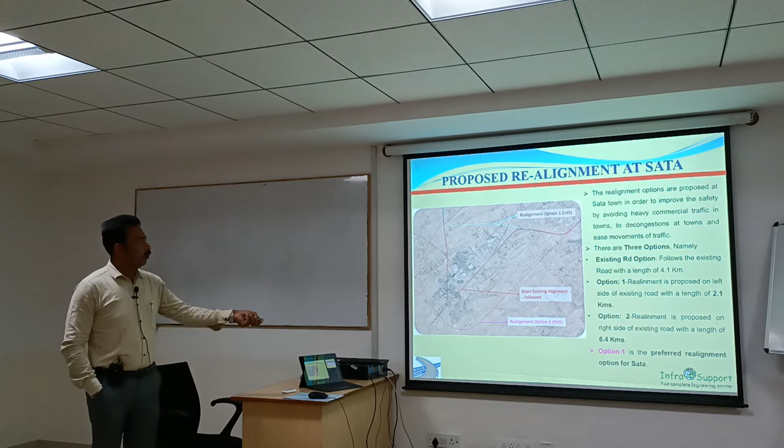All this is very critical for you to bring the proper cost estimation. If you mess up anything here, you do a wrong cost estimation, it will have impact on the construction, then you see variations - 100 crores will become 150 crores. Then everyone will be taken to task and start blaming will happen.

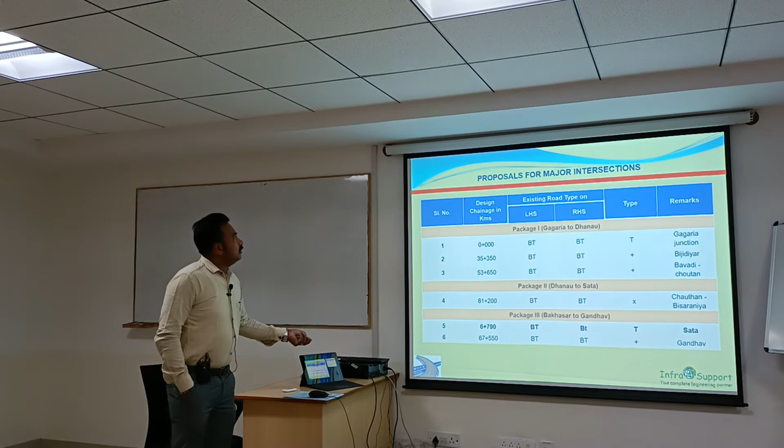So these are proposals for intersections, I'll skip. We did design for helipad. Along with the runway, we were also asked to design, I think, 4 helipads off the road. Okay, this is a landing strip. Okay, fine.

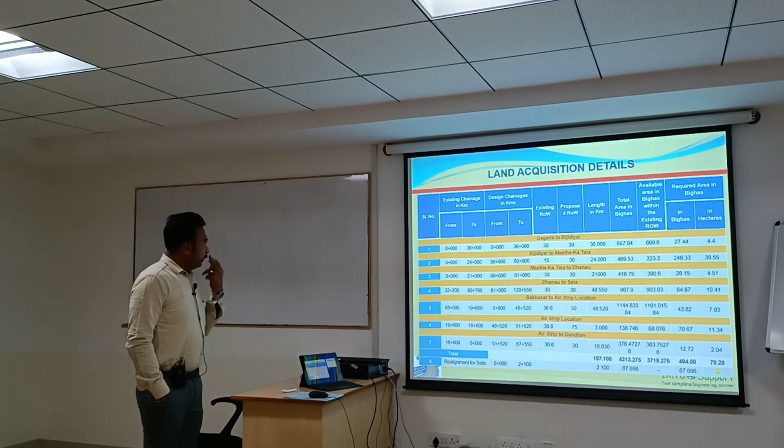Now, the critical point is, okay, you design everything, you run the ROW, you have to collect existing ROW from the government department, superimpose on it, and then you have to calculate how much additional land has to be acquired. We'll have to mark. So our job as design engineers is to mark those lines and give it to the land acquisition person, so that he will start working on the land record. So it is our job.

If we again do a mistake here, that we did a wrong line or we did not calculate the proper width, we'll end up in wrong land acquisition, and the project will get stuck.

In this project, we had experience. We messed up a little bit in ROB, railway overbridge location, and it took about 8 months delay in land acquisition, and we got 2 notices also. It's not actually our mistake - land people did not give, but at the end of the day, they always tell, okay, you did a mistake. And they withheld our payment for 6 months and then they released my payment. So you are very, very critical in these issues.

So you'll have to calculate the extent of the land, how much cost - it's all part of your cost.

Then another critical thing in all these road projects is utilities. Existing roads will have some water supply lines, electricity cables, telephone lines, village and rural schemes, some pipes and all - that is there. So we have to assess existing utilities properly along the road. Then we have to do a costing of that for the replacement. If you don't do that replacement cost, again the project gets delayed. Whatever that cost, if you don't consider in the estimate, then the department will have a problem. They will have to take some more approvals, and that gets delayed.

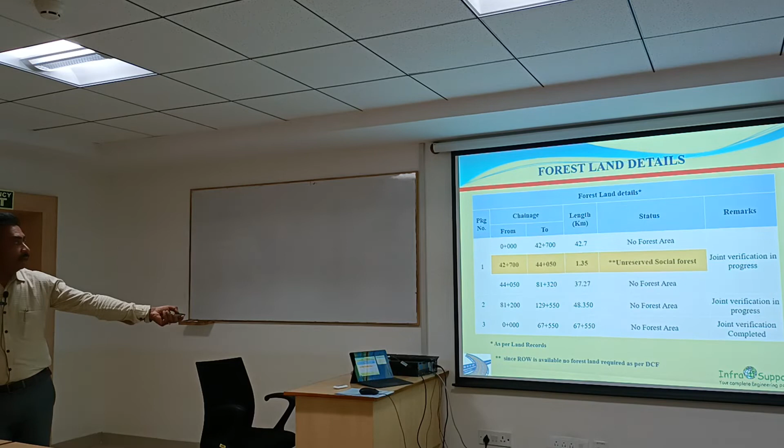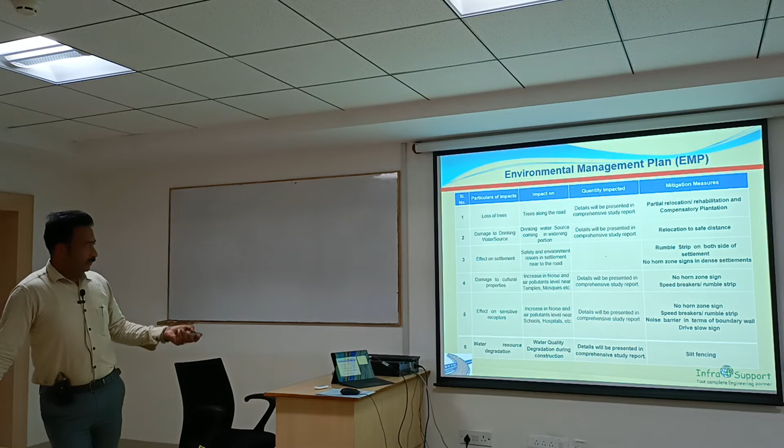EMP, I'll skip all this. So now project cost, right?

You did a DPR, right? Your job is done. As a highway engineer or a traffic engineer, all your job is done. But what's important is the project costing. Now, as a designer, you must also know how to do estimation and costing. That is a critical knowledge you must have.

In our companies, what happens is we always have separate professionals. Geometric design is done by somebody, pavement design is done by somebody, traffic is done by somebody, estimation will be done by somebody. Okay, so because it's a huge work, everyone is specialized for it. But I always recommend all my staff, my employees, that you must know everything. Then only you become a good professional civil engineer.

If you know only one subject, yes, you must get specialized in one area. Like you must specialize in pavement design, so that after 5 years, 10 years, any question asked to you on pavement design, you should be able to answer. At the same time, you should know geometry design. You must have knowledge on estimation. You must have knowledge on everything. Okay, that is very critical.

You always learn that, and you cannot be master of all. At the same time, you should not be jack of all, right? So pick one area of your specialization always. You are interested in geometry design, you pick that as your specialization. Pavement, pick as pavement. You want to get into traffic transportation, pick as that. That is your specialization major area. But you must know and work in other areas too. That will help you in building your career.

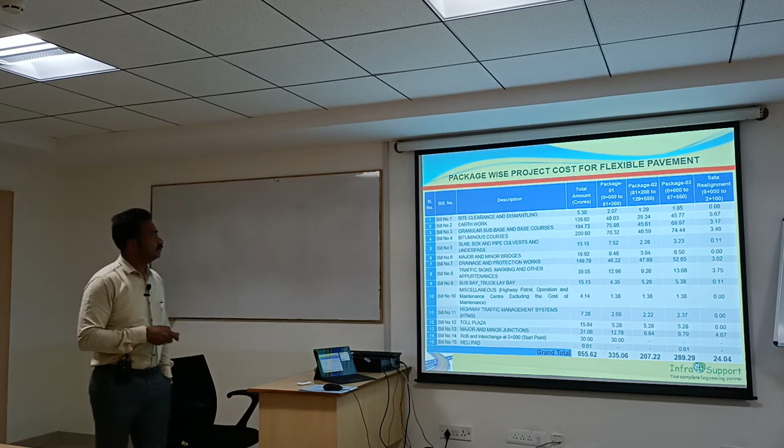This is where you have to do a lot of value engineering also. Can I reduce this? Can I do something in bituminous courses? Instead of DBM, can I do a different kind of bitumen?

Typically, if you go to America or Europe, they will keep about 10% of the cost for traffic safety. So compared to that, we are still very, very less. This directly shows why we have more accidents here and why they have less accidents there - they spend a lot of money on road safety.

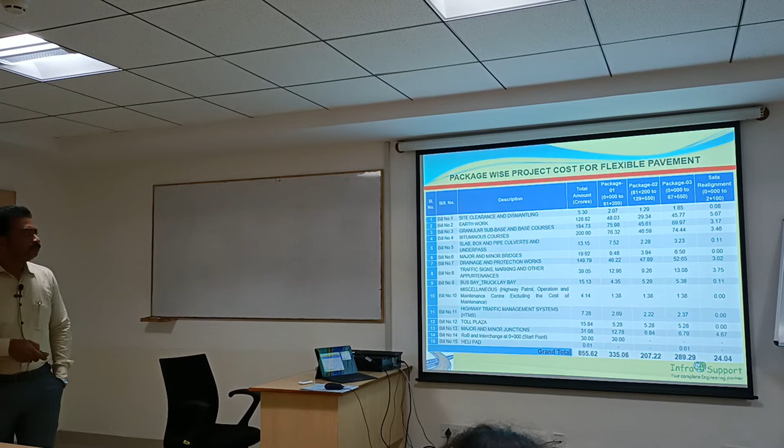Once you get this cost, this is the actual construction cost, right? But that is not the project cost. To that cost, various other costs have to be added.

We did this in 2015-16. The tendering might get delayed, so you need to have a little bit of contingency for that.

Then you need a consultant - like if we are a consultant, we also do supervision for project management. There is a fee, 2% of the total project cost, for PMC. The government takes an administrative charge of about 1%. These are norms. Then the government also spends about 1% from its side for quality control.

Then nowadays it's mandatory to have a road safety audit - another 0.5%.

Now, do you think today's cost remains the same after 1 year? After 1 year, it's called escalation. So for every year, we keep about 2.5% - 2 years is about 5%. Then once the road is constructed, the contractor has to maintain it for 4 years, and we pay about

5% for those 4 years. That cost has to be added. If you add all this, it becomes 1042 crores from 855 crores.

Then there's utility relocation. At that point of time, we normally haven't got the complete picture of utilities, so we put some value - here, 20 crores. Then there's the cost of acquiring properties and resettlement - another 37. So the cost has become

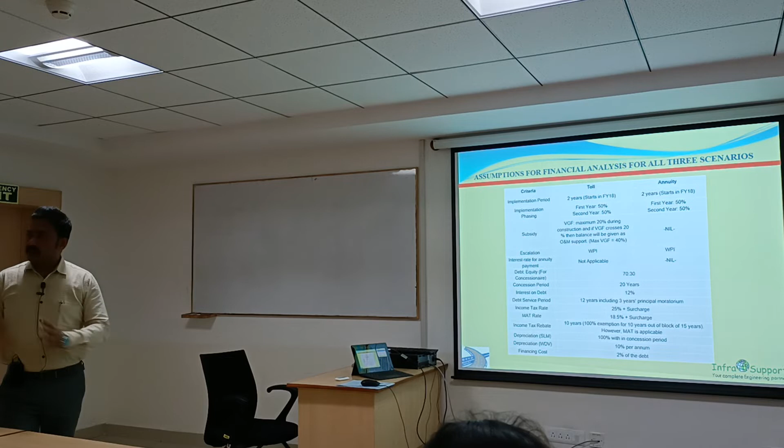You invest money on this road, you get savings only in travel time, savings in fuel costs and all. Financial analysis is basically, if as an investor, as a contractor, if I'm going to invest 1,000 crores on a toll project, do I get back my money? This is financial, this is real finance.

Put the money, take the money, like your savings account FD. I'm going to put my 1 lakh here, I get 6.6%. So per year I'll get what? 6,600 rupees, or 6.6%, right? Now there's income tax, 30%, deduct that. So how much am I getting? This simple calculation is financial analysis.

What we do in all these NHAI projects is, first we do analysis for toll. Suppose a contractor comes and puts all the money, like 1,200 crores he will invest, and starts collecting toll for himself. Is it viable if he does like that? I put 1,200 crores and keep collecting the toll. If I collect for the next 20 years, will I get back my money? This is a simple outcome of this toll analysis. But with the kind of traffic you saw, 500 vehicles per day, it is impossible to get back the money.

In that case, what we should do is go for annuity analysis. What is annuity? Here, the contractor puts all the money and collects toll. Whereas here, what happens? He will put all his money, but he is not going to collect that toll. Government will pay him fixed returns every 6 months.

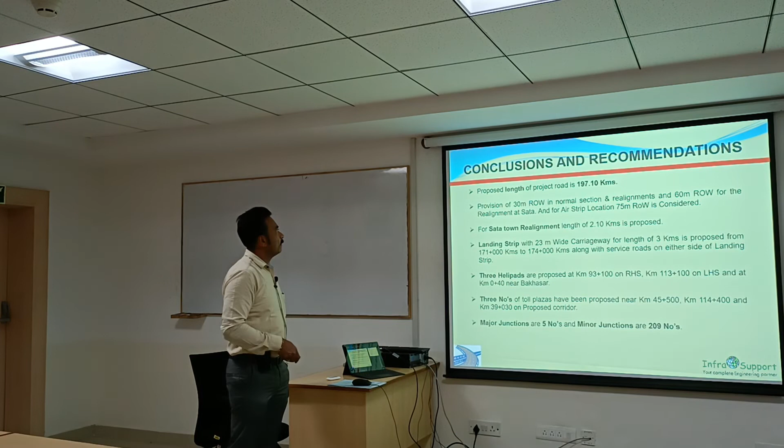After doing all this, we have to arrive at final conclusions, based on which everybody will decide what is to be done in the project.

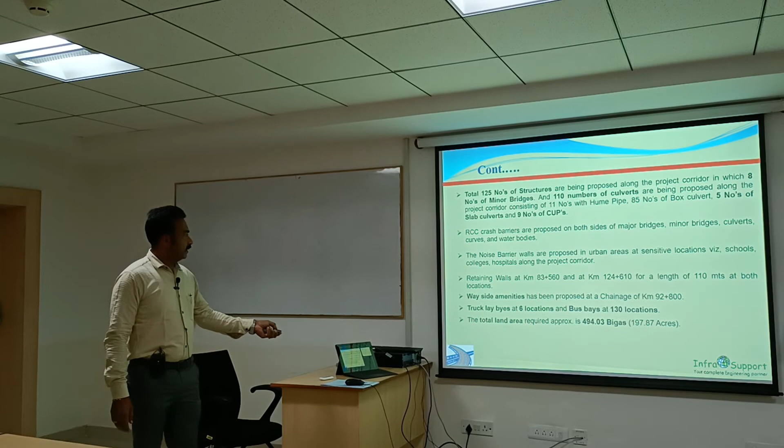So here we mention all this: what is the proposed length, what is the ROW, where the realignment, landing strip, helipads, toll plazas, major junctions, structures, retaining walls, structural details, total land required, flexible pavement analysis done, rigid pavement, estimated cost.

So, see, you saw your recommendation, just read this sentence.

Done? What is that? Did somebody just say what you understood?

One of the reasons we felt was that in Rajasthan, temperatures rose by 50-55 degrees. Placing concrete at that temperature causes a lot of cracks, so we didn't want to take that risk. We recommended going for flexible pavement. But we are not the final authority, as a consultant we can only recommend. Finally, NHAI has to take the call.